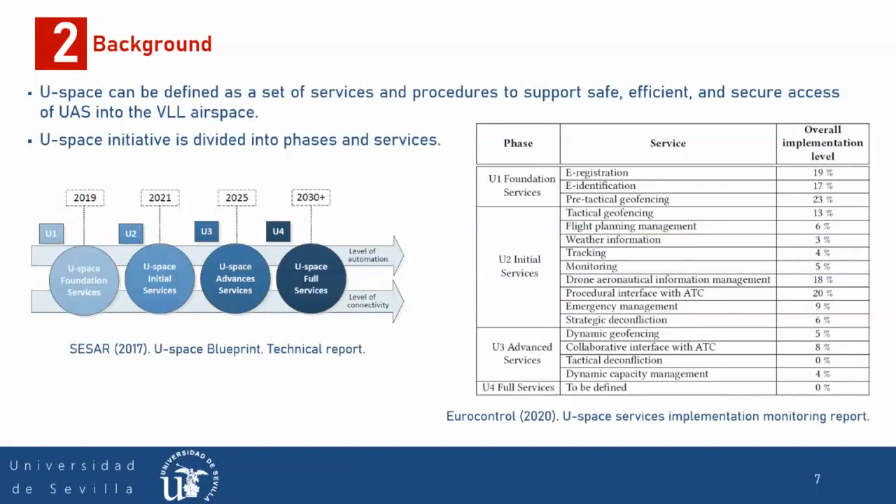The services right now, because U-space is still in development, as you can see in the timeline, there are new services and the names have changed. So this is the foundation of the naming of the U-space services.

This is coming from the regulation we mentioned, the U-space framework regulation that will apply from January 26th of this month. In this regulation, two relevant entities or roles are defined: one is the Common Information Service Provider, or CISP, and another is the U-space Service Provider, or USSP.

First I'm going to define what is what. The Common Information Service Provider is an entity that has to be certified. Normally it's a national entity, and it is in charge of declaring the airspace, normally in a national part, to declare the U-space airspace. When you have an airspace, then the CISP can define the U-space airspace, and it is also the single source of truth in terms of U-space.

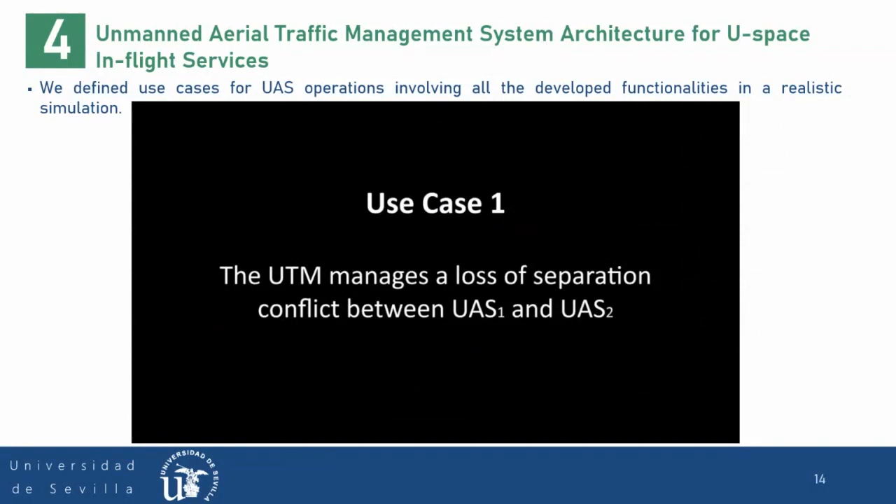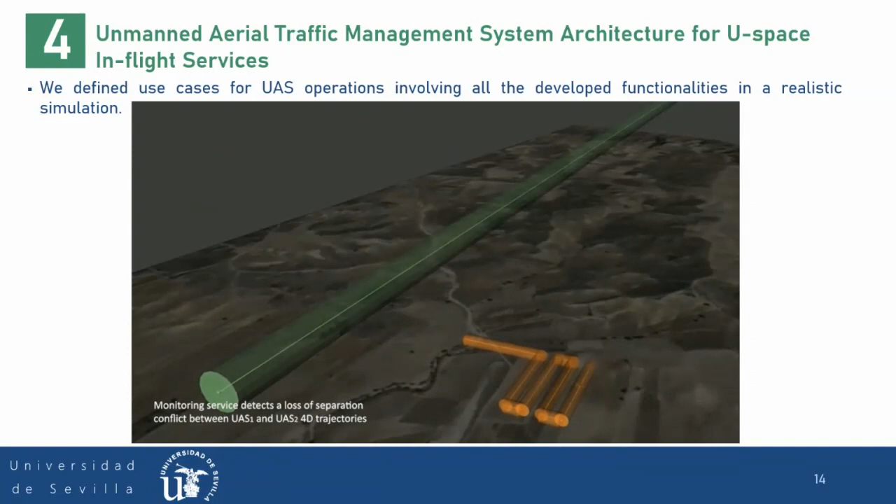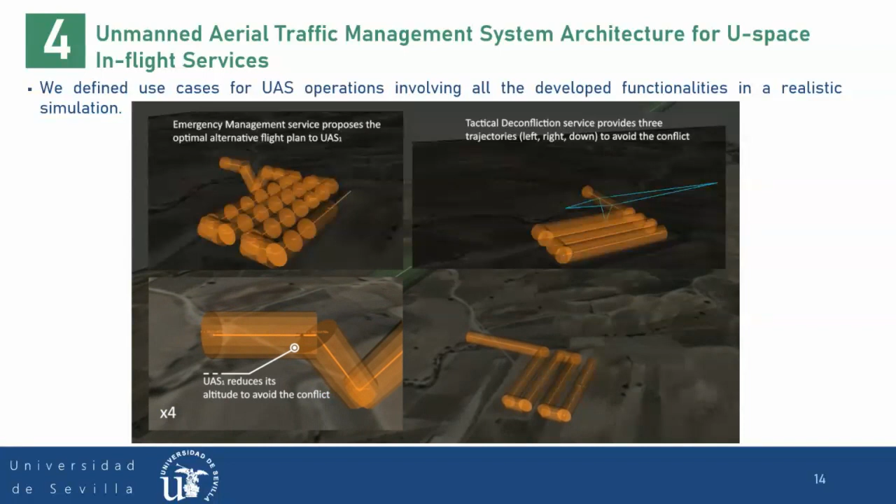The first use case is that the UTM has to manage a loss of separation between 2 UAS operations. One UAS operation is the green one, and it starts the operation on time. It's a fixed wing UAS, but the UAS in orange is delayed on the operation. So this delay shows up, and the monitoring service detects that in the future there is going to be a conflict. So tactical deconfliction and emergency management services both decide what is the best solution in order to avoid this loss of separation threat.

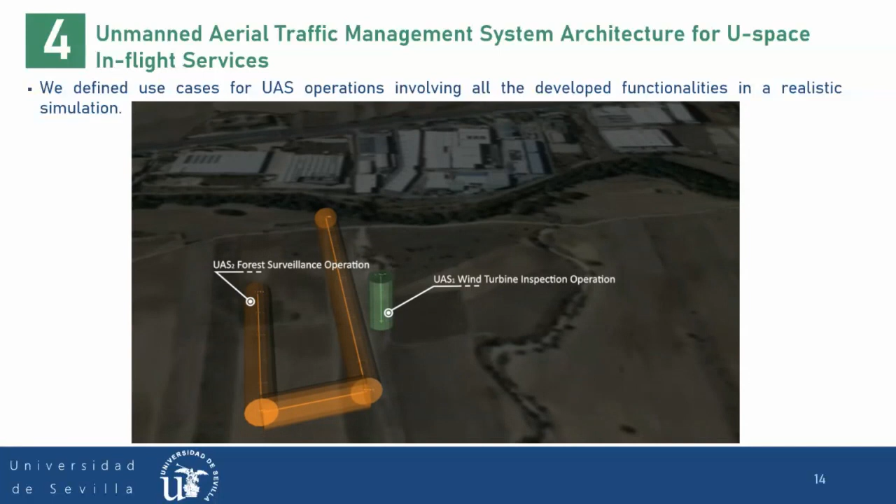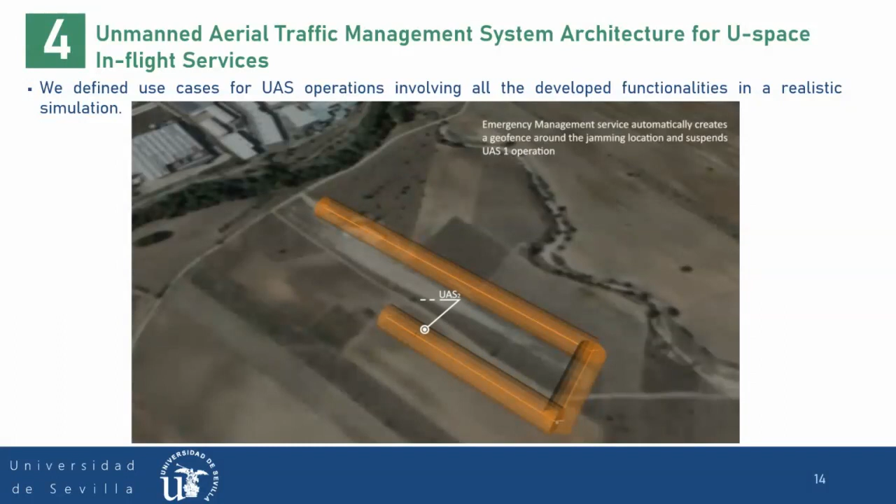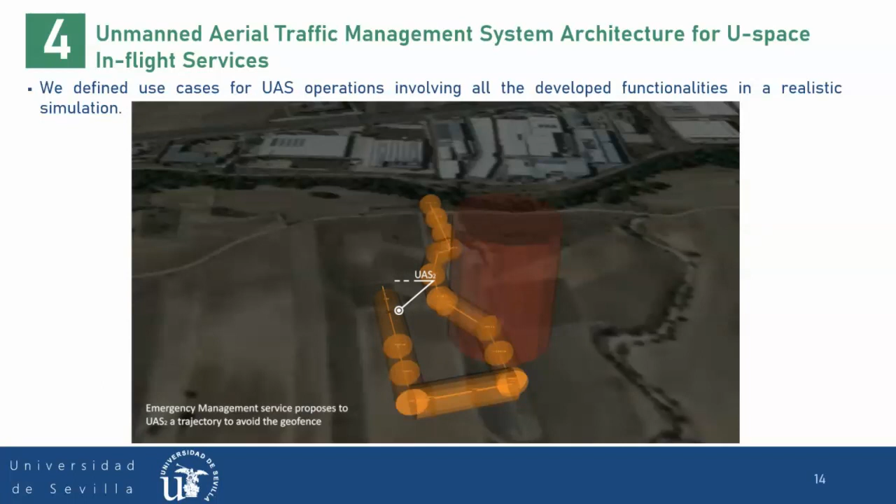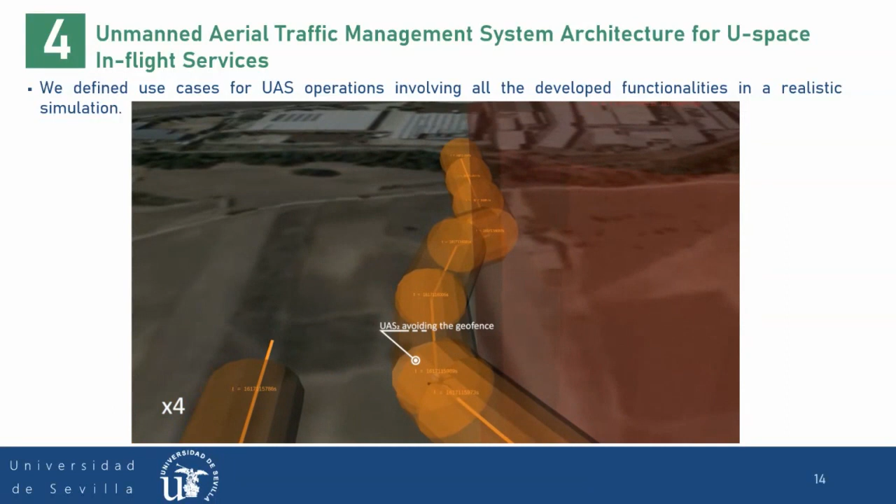The other use case defines that the UTM has to manage a jamming attack and a geofence conflict. In green, we have a UAS that is making a wind turbine inspection, but this UAS suffers a jamming attack. So emergency management creates a geofence around the jamming attack. So this geofence that you can see here now in red enters in conflict with the other UAS that is flying in that moment, and tactical deconfliction, monitoring, and emergency management again decide what is the best option in order to avoid this geofence and not enter into the jamming volume that is declared.

Passing to section 5, which is the contribution of the threat methodology that we have developed. We have built a real-time decision-making method. Real-time because we have validated in the UTM before that this is working in real time. Decision-making is automatic decision-making, and we provide the UAS operator with our output, and manage threats that can happen when several UAS are flying in the airspace.

First, we identify a set of generic threats that can happen in the airspace. We identify them, and we classify these threats depending on how dangerous the threat can be in the airspace if this happens. Also, we define possible actions that our UTM system or our methodology can provide or suggest to the UAS operator, and possible maneuvers that the UAS can make.

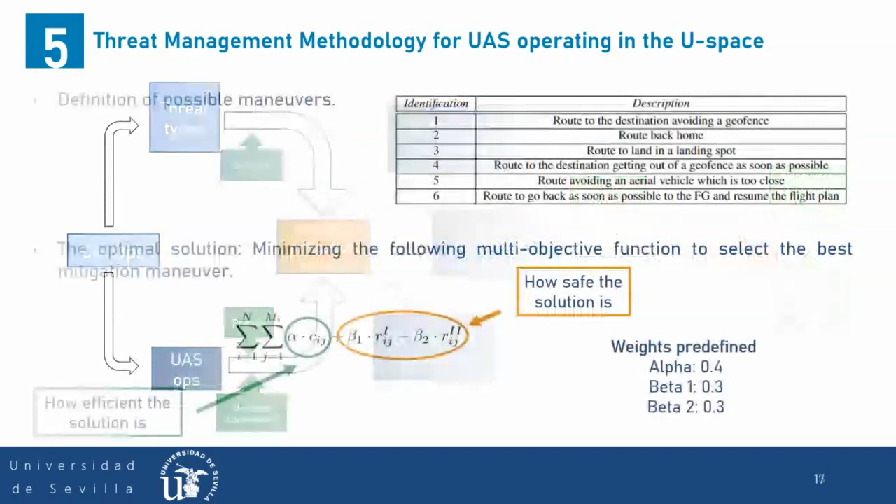In this slide, first we have a table of the maneuvers that we consider in order to solve the conflicts, and then we have here the function that we have minimized in order to get the optimal solution. This function is a multi-objective function because we are evaluating in one way the safety of taking a maneuver, and on the other hand, we are considering the efficiency of making a maneuver.

So it is important to mention that depending on the weights that you have in the function, you are going to have different results. We have predefined these weights, and we gave more importance to the safety, that is beta 1 and beta 2. The sum of both is 0.6, and alpha is 0.4.

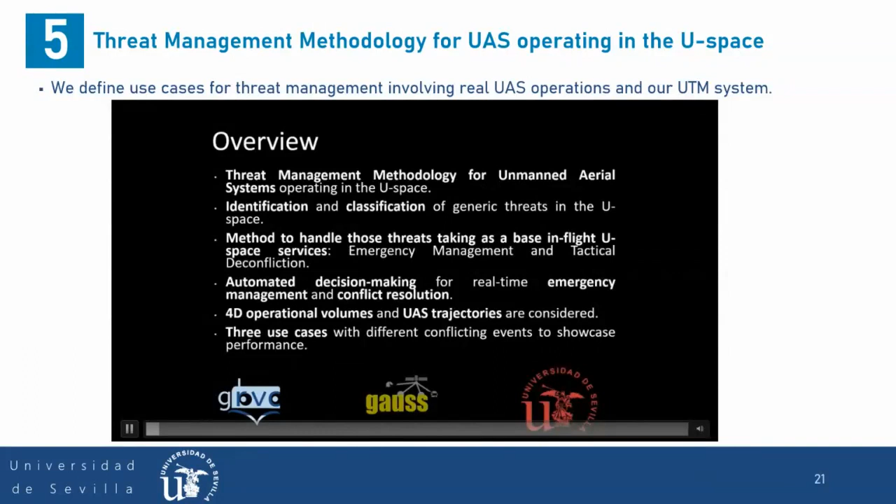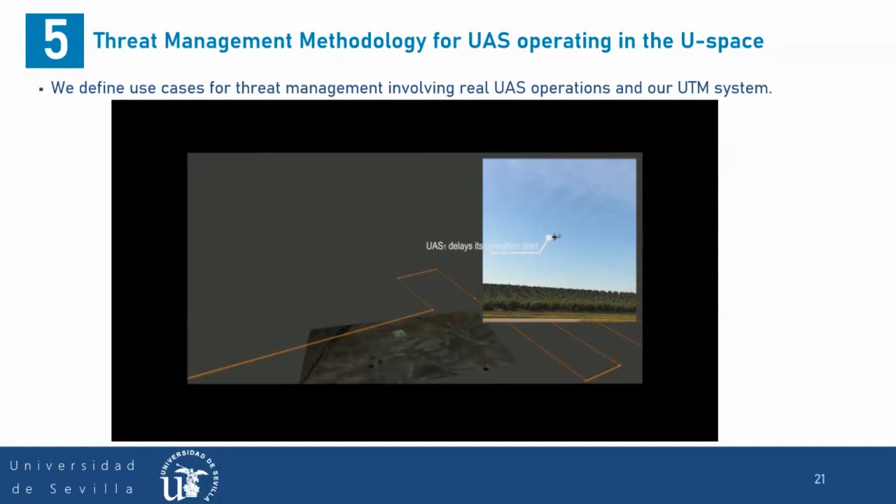The first use case is, again, a violation of safety distance between UAS. In this case, we have, again, a fixed wing and a rotary wing UAS. We have here the start of the fixed wing UAS operation. And the rotary wing UAS has a delay on the start of the operation. Then the monitoring service detects that in 4 dimensions, spatial and time, there would be a conflict.

And tactical deconfliction will provide different solutions, in this case for the UAS that has less priority in the U-space. And emergency management calculates the optimal solution that we can suggest to the operator, and the operator accepts or does not accept the proposal of the methodology and the UTM system.

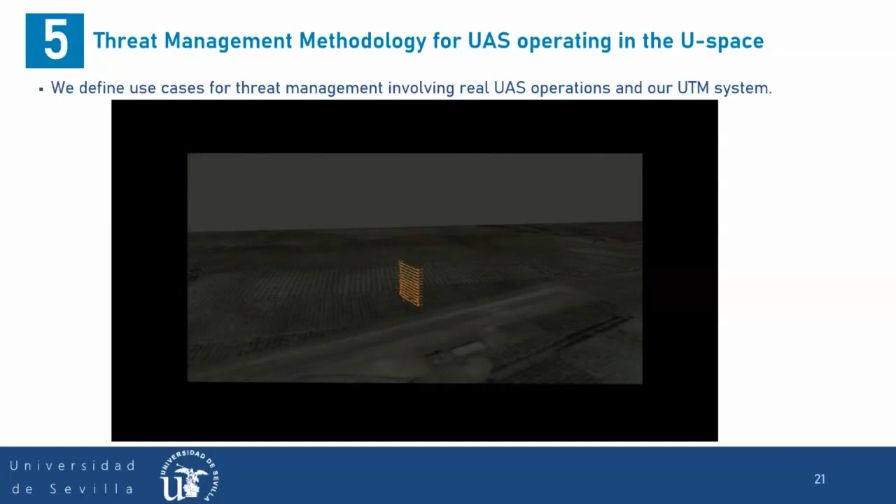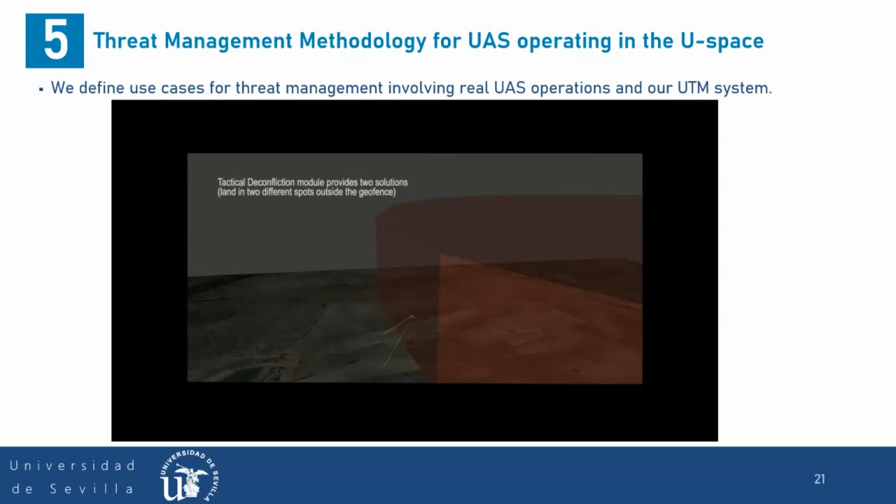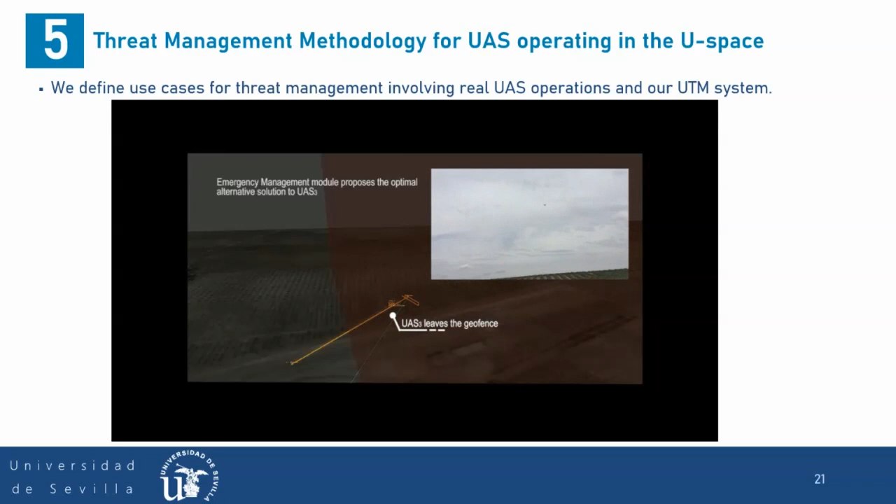The second use case is that a wildfire is declared in a location. So emergency management declares a very large geofence, and this operation that is taking place here has to leave the wildfire location. So tactical deconfliction provides different alternative flight plans. And emergency management provides the optimal solution in order to leave the geofence.

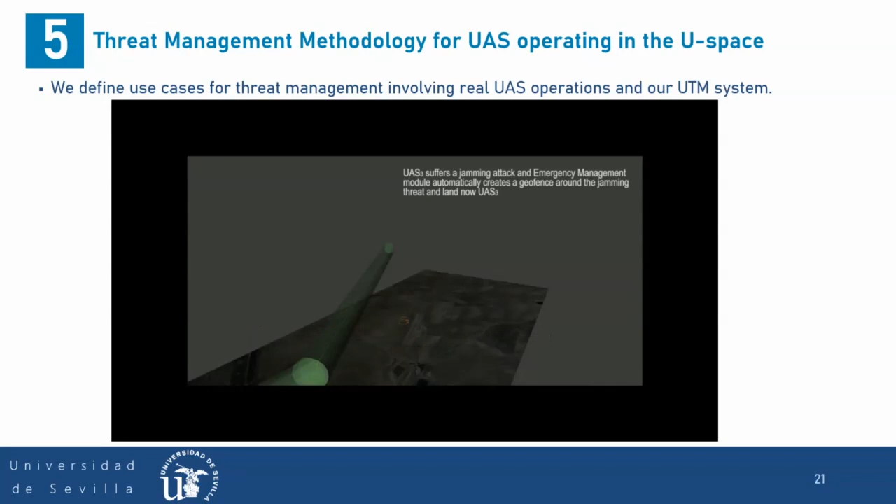This last use case was a conflict between a fixed wing UAS and a rotary wing UAS. In this case, the rotary wing is the one that suffered a jamming attack, and the fixed wing UAS that is making the operation has to avoid it. In this case, the fixed wing has to avoid the geofence created by the emergency management.

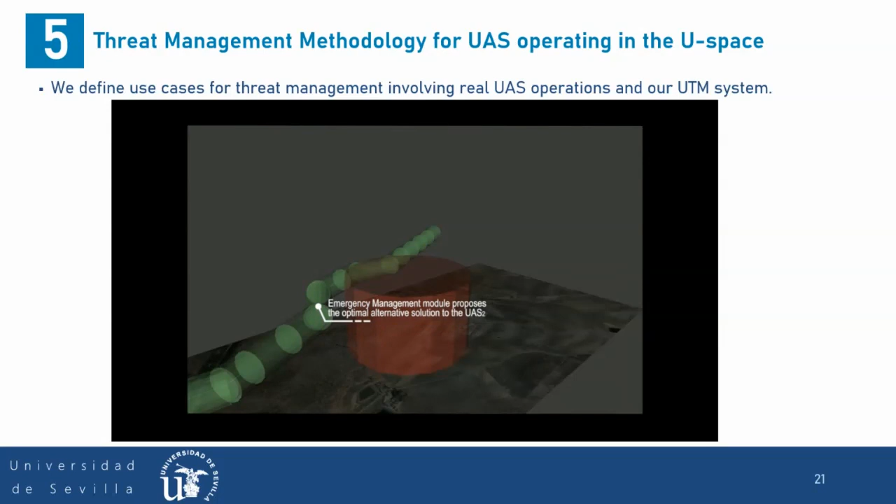The last section of the thesis is the conclusion and the future work. Some of the results that we have obtained: we have analyzed the regulation and the U-space framework. We have described and implemented a SORA methodology for a multi-UAS application for media production. Sorry. We have built a service-oriented, modular, and flexible architecture for UTM in the context of U-space.

We have designed, developed and implemented in real experiments with real drones, considering fixed wing and rotary wing drones, a methodology for automatic decision-making to handle threats that can happen when different drones are flying in the U-space.

Also, as conclusions, we found different problems in the experiments. One of the problems was loss of communication between the ground control station and the drone, loss of telemetry. So if we lose the telemetry in the UTM system, we cannot take actions.

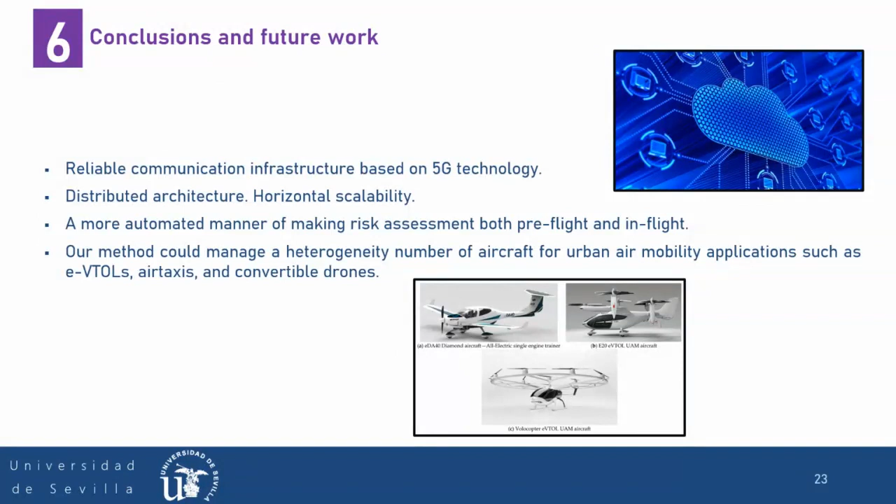So this is all from my part, and now I'm open to any discussion that we want to have. This video is just to see.

Okay, thank you for the presentation. So now we're going to open a round of questions, queries, whatever. We're going to start with Niklas. Niklas, do you hear me? Yes, thank you for the honor to start. I hope you can hear me clearly. Okay. Yeah. We can go.

Very good. Yes, a very good and clear presentation. Thank you for that. I have a couple of questions, and I start with the most obvious one. What do you consider to be the most important of all these contributions? You identified three important areas in your work and also a couple of very interesting new innovations. What do you consider the most important of all of these points? Okay.

My last question for now, I don't want to take too much of the time: on slide 17, you mentioned that there is a trade-off between efficiency and safety in your multi-objective function. How do you decide on this trade-off? And my more specific question would be, wouldn't a multi-stage process be better here, to first decide on a couple of safe solutions, and then in a second stage select the most efficient among these, instead of mixing this up in one step?

Well, it's an approach. It's an approach that you are proposing, but we decided to make it like this because one of the principles of building a UTM is that the UTM system has to be safety centered. So that's why we, as designers, considered prioritizing safety instead of efficiency, because the principle of the definition of a UTM system tells us this.

But it is also important that you get a compromise between getting to finish the operation and being safety centered. But it is true that another approach is the one that you mentioned about considering first safety and then efficiency. But this is why we made it like this.

Okay, thank you. That's it from my side for now. Thank you. Thank you to you for being here, Niklas. Thank you, Niklas, for your contribution. So now the next turn, let's go to Christian, please. Hello, Carlos.

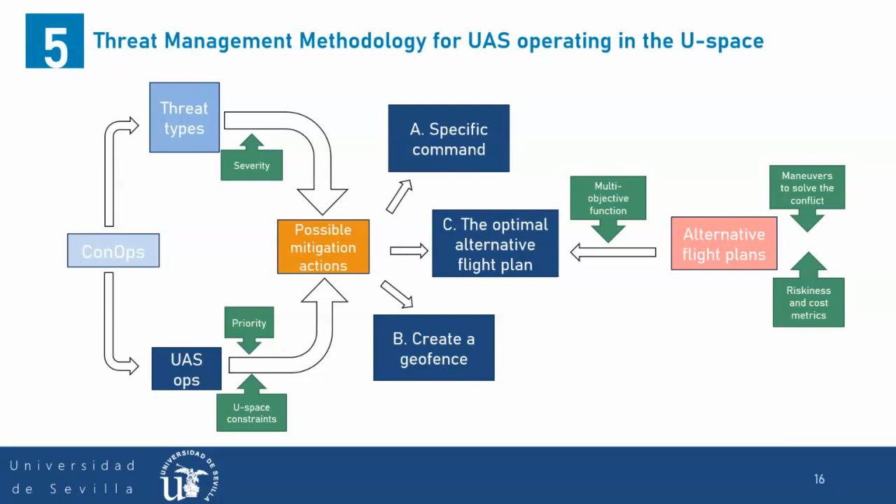Okay, thank you. I have a lot of questions, but I don't want to take over the session. So just on the cost side, again, because I think it's the next slide. My two questions are okay.

So you define the cost as the distance to your flight plan, or U-plan, as it is now called. I don't like the name. But what is your view, or how would you include more the view of the airspace user or the operator here? Is the distance to the flight plan the only way to determine the cost to the operator, or would you include any other parameter or element of the operation?

Well, I didn't think about that. There are some divergent things here, because when you go to the theoretical definition of U-space, you are trying to make a decentralized way of managing the airspace, where the U-space operator can see in the UTM platform: this is occupied, this is not occupied, I want to go there, so I submit this flight plan and I get the approval of the UTM.

Carlos, you're using ROS, yes, so we all know it very well. That's a good point, and it's related to the question: do you ever think that anything made relying on ROS is going to be certified by any authority?

No, I don't think so. This is a research deployment. It's open source. I got interest from University of Cranfield, from a professor because he wanted to launch our use cases. We had a meeting with him to try to teach him how to launch our approach. But I suppose he wanted to make some proof of algorithm, not certified by a commercial entity. I don't think so.

And the architecture, as I said before, I am working in a UTM system in a company now, and we are developing the UTM system as a web service, a web application. It's not using ROS, it's using Amazon Web Services.

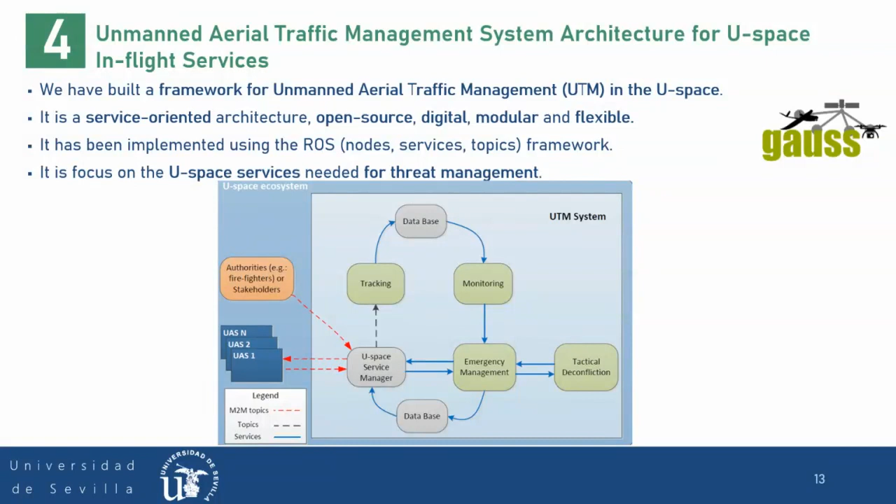But in terms of considering kinematics or this kind of feature that UAS can have, we didn't consider this. We just consider that if you are a fixed wing, you will have more priority. We just considered this because it's a simple use case.

One of the questions I was expecting is how the framework can be adapted quickly to electric vertical takeoff and landing vehicles or air taxis. Yeah, it can be adapted because you just define priority depending on the maneuverability. If you have a fixed wing aircraft, it has more priority than a rotary wing UAS. But we didn't consider the kinematics or this kind of feature.

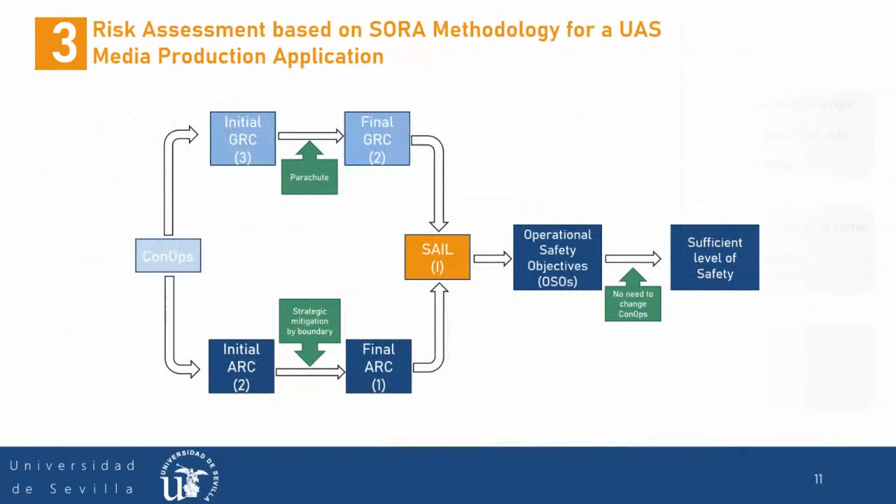But suppose that ROS is an option, right? Then I will need more U-space services, because regulation - the first regulation - requires, for example, in the UAS operation, different services that are pre-flight: registration of the pilot, registration of the UAS, strategic flight plan management, strategic tactical deconfliction. All these services are in the pre-flight phase of a UAS operation.

We focus on the in-flight UAS operation. So we are proposing an approach for that, but we are not considering things that are needed for a UTM system before starting the flight. And again, the regulation is more focused right now on the pre-flight phase, like UAS registration, pilot registration, weather information, and whether I can start the operation or not.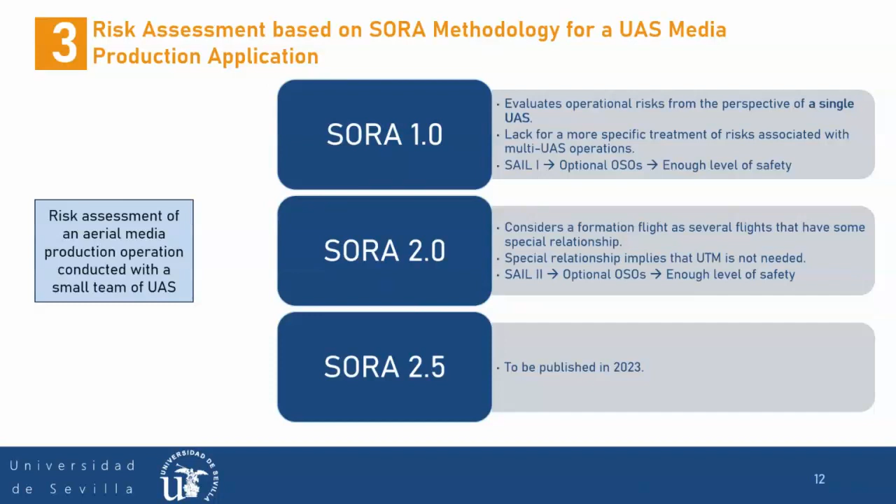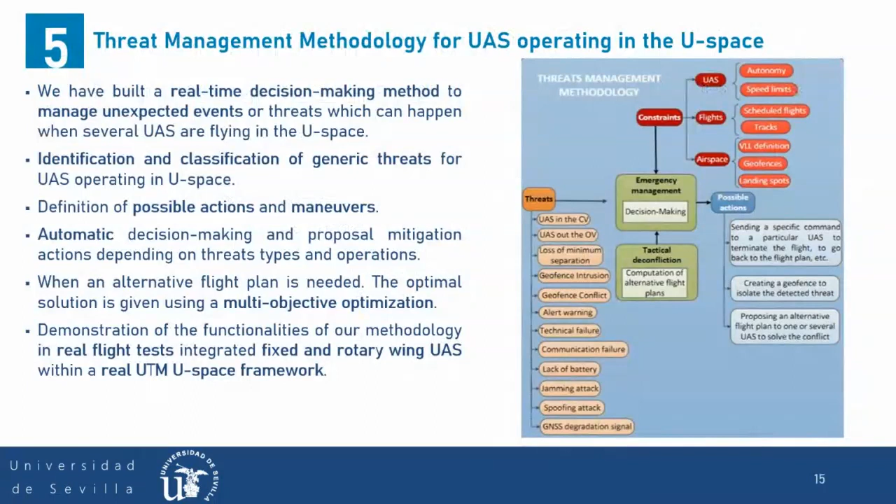Let's see, now going to the way that you solve it. So first, it's not clear from what you've said how you solve it. I think you are using a functional input for that. What is the method that you use to solve that?

There is not really a method - yes, you have a low number of UAS in the space, you have just 6 types of maneuvers, so this is a discrete problem. You just have to calculate it like a matrix. So there is not a method for optimization. There is no optimization. Why? As far as I see, it's just a linear program.

So why would you use that mathematically? Because, well, it's not optimization indeed - it was not one of the contributions. I understand, it's the way that you want something to do like unmanned, and something to do autonomously, let's say. But somehow, I didn't know that - so now you're telling me that you just put this there heuristically, the best option that you think works based on experience. So how do you automate that, right?

So this is how it's minimizing this function and finding the cost, as I put in this slide. For example, here this is plus and this is minus because in this case the risk number two metric: the farther you are from the conflicting situation, the safer it is. So that's why we put a minus here, a plus here, because if you are still in the conflict, the more time you are in the conflict, the more dangerous it is. So it's the opposite. This is the way that we thought about solving this problem.

Okay, so I mean that's one thing that we could explore, I think. Also related with another question. Here we have put in some alpha, beta, right, and so on. So I would just put the whole thing as an optimization problem, minimization, as you say, including the alphas and betas. Why is your decision better than a machine with a lot of information that you cannot cope with? So why do we always presume that our decision is going to be better? We could try what they say. What do you think?

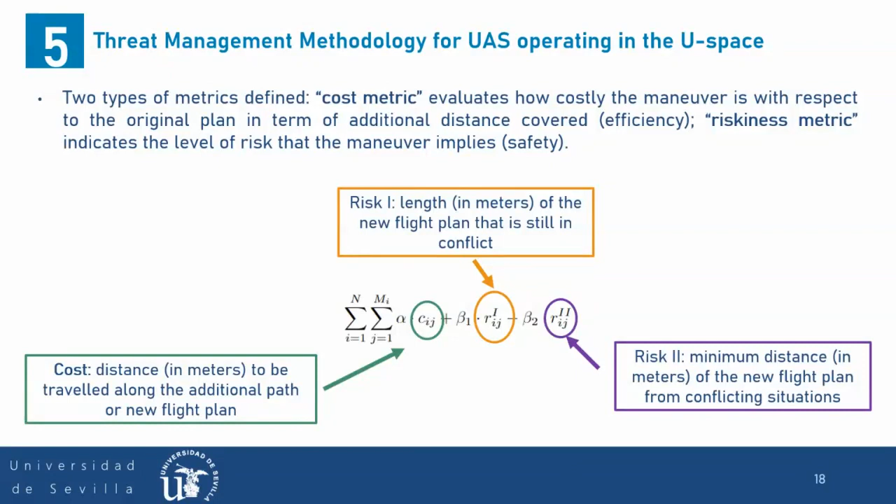And there's also something else regarding this. So it's for the execution. So this is all executed offboard? Executed somewhere else, and then you send the instructions to the UAS, as far as I understood, right? Can you repeat, please? Where is this function executed? The whole logic and the whole execution is offboard, on the cloud? Well, you just send the commands to the UAS.

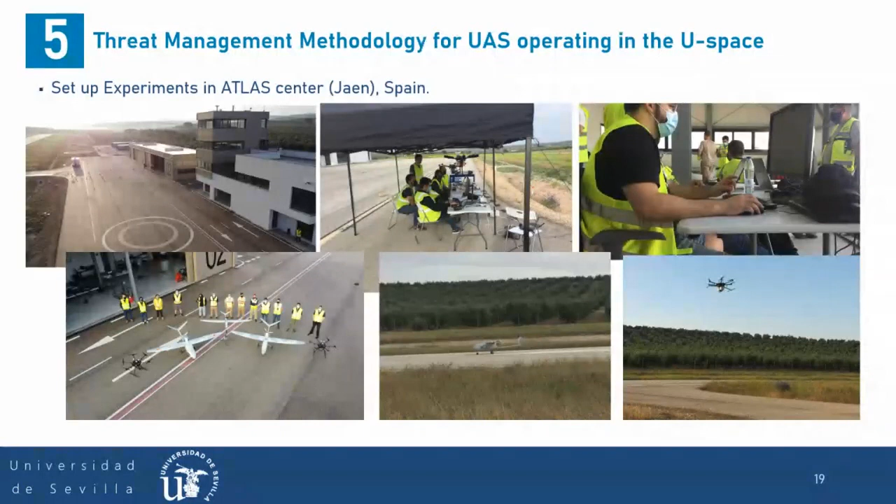Well, it's implemented in a computer, in the UTM framework, in the ROS framework. We have different modules, and the module that decides what is the best action is the emergency management module. So it is implemented in this UTM computer, in the setup. Then you have here an interface that gives you the input that you need for taking the decision, and you get the output. What are the outputs? The output can be a command, an alternative trajectory, or create a volume.

So the interface was made with other partners via messages; the messages we shared were JSON messages. In our case we were sharing ROS messages, so we have a little module that converts ROS messages to JSON. And then by using the MQTT protocol, we communicate via internet with the server of this company I was assigned with; they developed a human-machine interface for the project. We send our proposal or our output there.